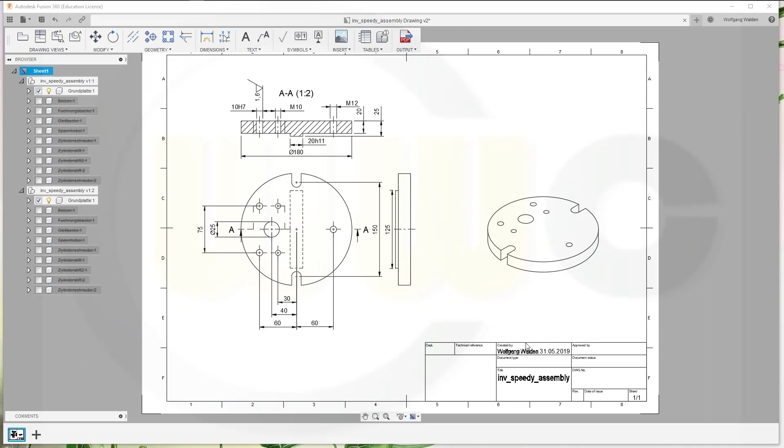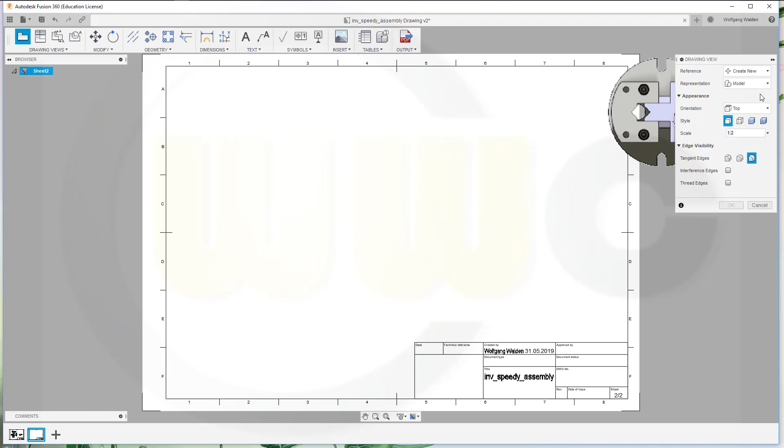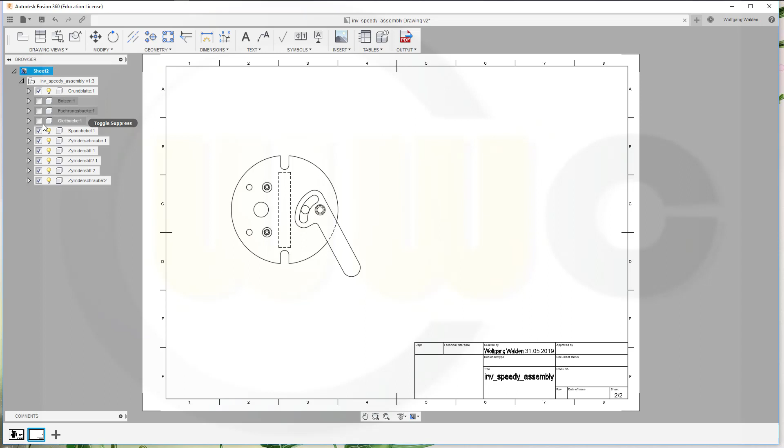Okay, let's insert a new sheet, and I need of course a base view. That would be the top view, yes. Scale should be maybe 1 to 2, yes. And let's see, we've got visible edges, I need hidden edges. And let's place it here. And okay. Now let's hide all those we don't want to see. I just switched them off.

Okay, I need a projected view, so I go to projected view. That would be the parent view, and let's move this to this side. And okay. This one should be, of course, without hidden lines. So just double click and make it only visible edges and close.

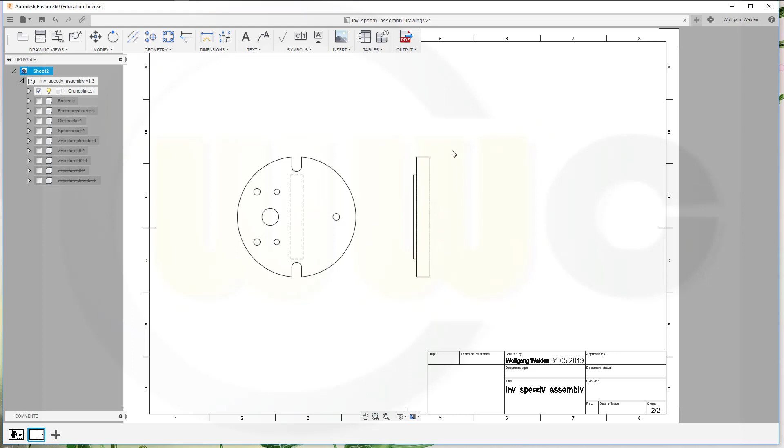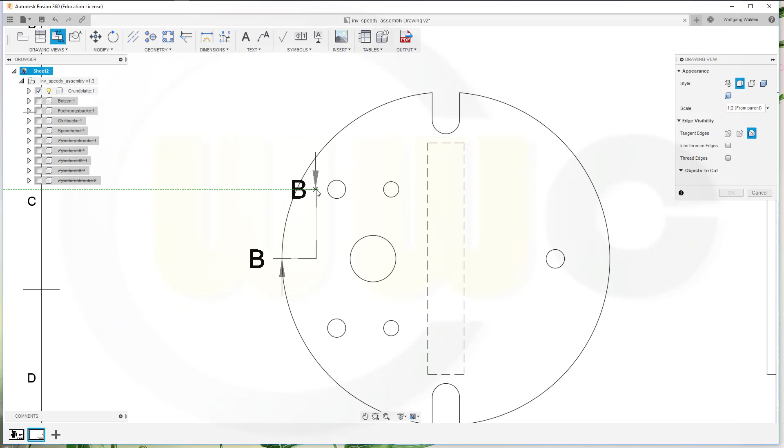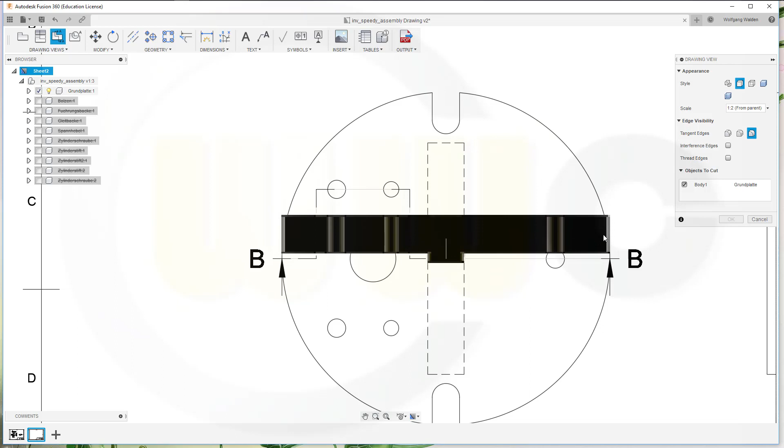Now for the section view, you have to take care that you align it properly. I want to do it here. Let's go here, click, move a little bit, let's zoom in over here, then go straight up, click, go over here, click, go straight down, because if you're not straight down it will not work properly, like this. And now go for continue, and I want to move it above, and yes, that's okay, so just confirm.

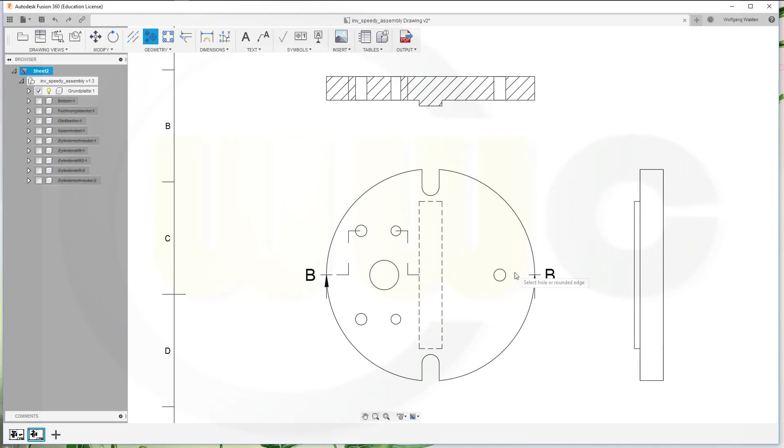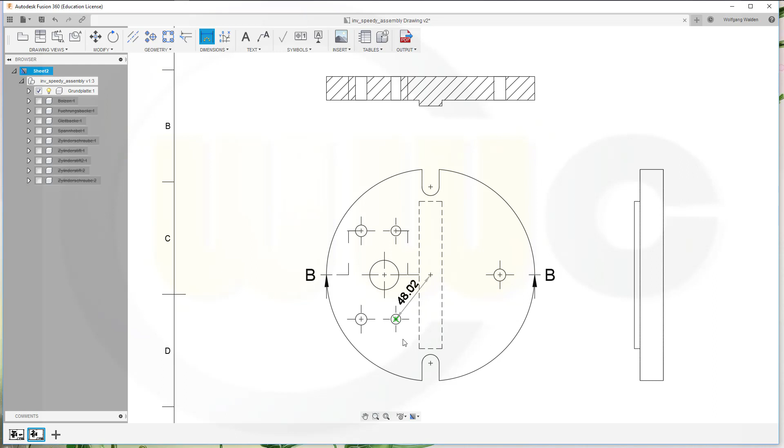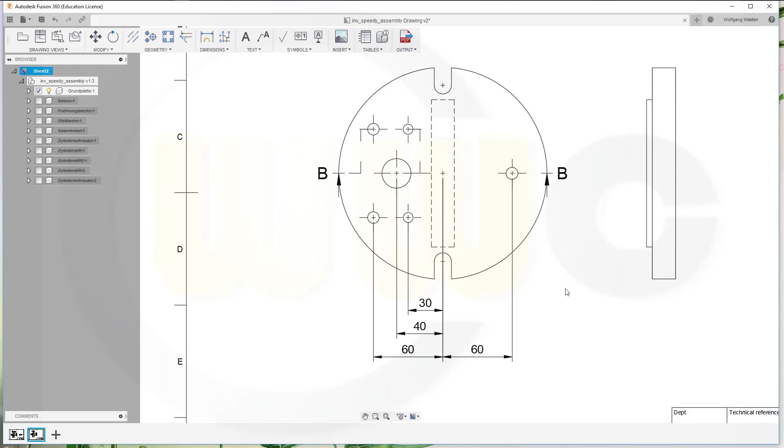Before I begin dimensioning, I will insert those center marks. So there should be one here, here, here, there, here, there, over here, and of course one here. Now begin dimensioning. I want to go from this one to that one. That would be my start dimension for my baselines. So go to baseline dimension, select the baseline, and select the other circles like this, and right click OK. Now I can move this up like that, for example. Some more dimensions.

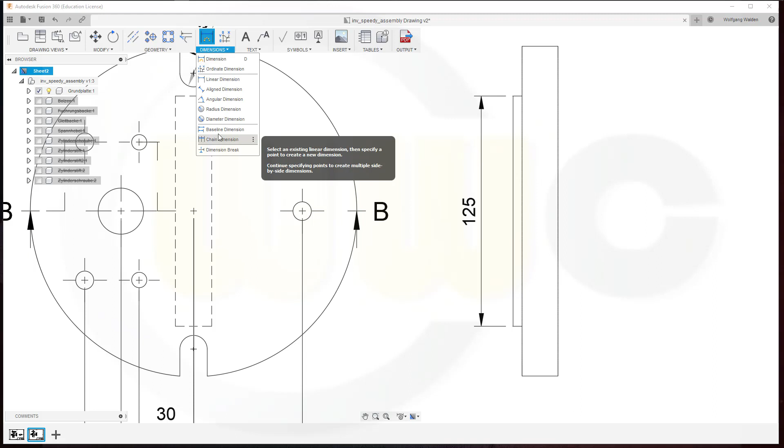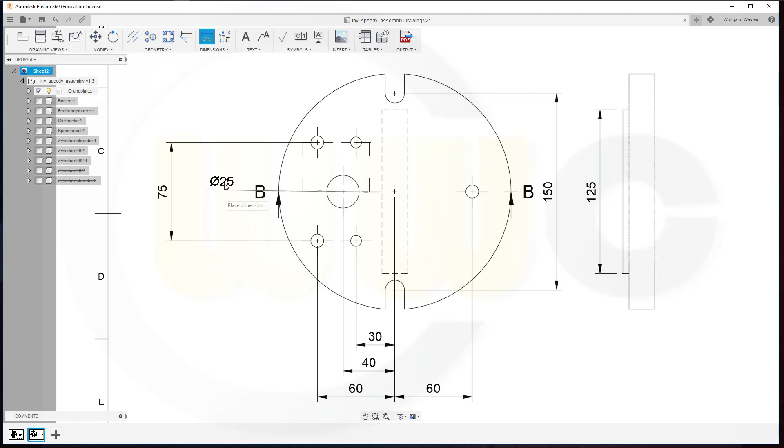This one. Let's try circle, circle. Not possible. You can go, yeah. So I have to select the center marks like that, then it will work. Another one here, and for that dimension I could not make it vertical or horizontal aligned. I have to live with this one. Another one here, up there, this one, this should be diameter. I will add this afterwards.

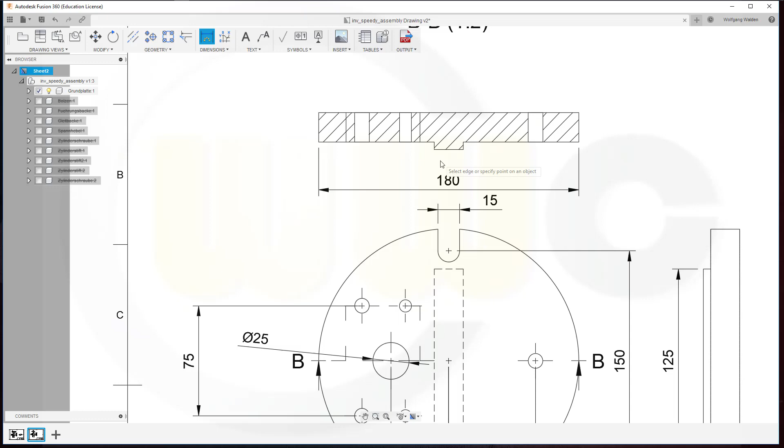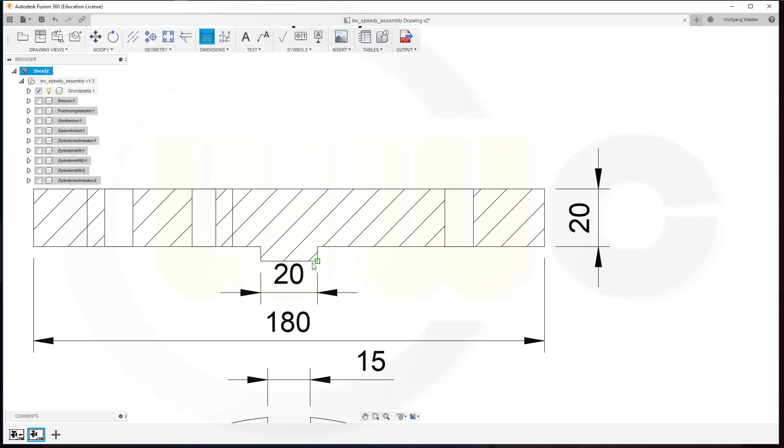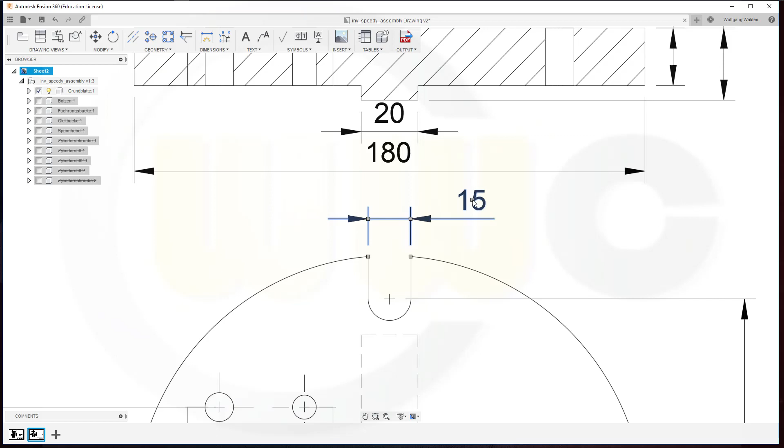This should be 20, and this is 20, and that one is 15. Okay, now move this up a little bit. Okay, move that one. Move this a little bit down. Move this over here. Maybe like that. Now I have to change.

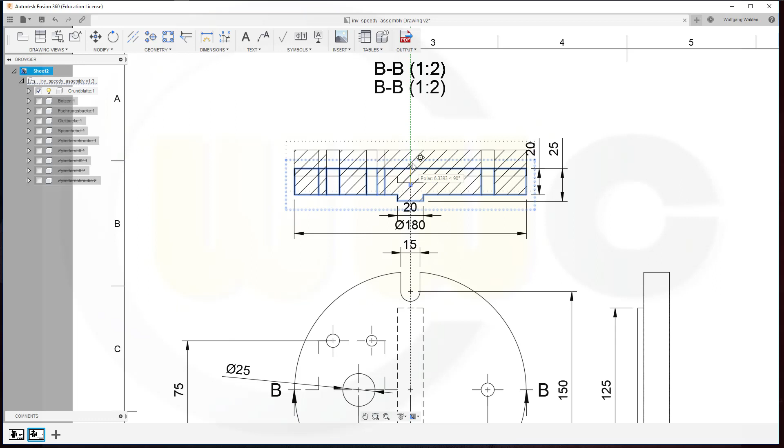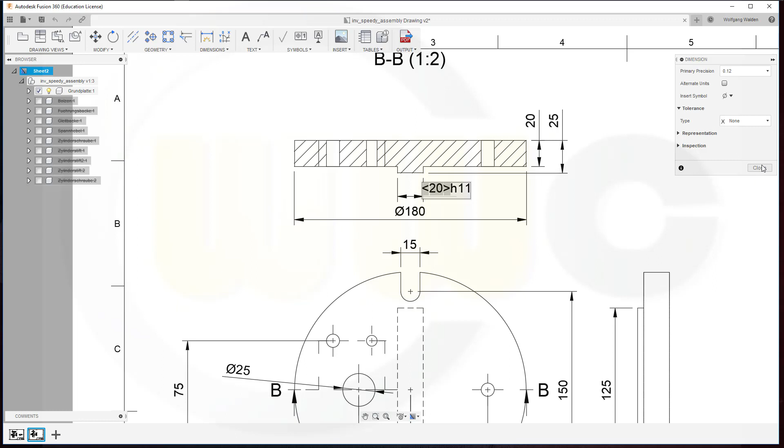This one should have a diameter, so double click it and give it a symbol, but before the 180, that would be this symbol. Close. And maybe I should move this up. Maybe like this. Then I got a little bit more space to make this more readable. So this one should be here, and I want to add a text that would be h11. So for tolerance, limit deviation symmetrical none, we'll go for none and we'll add h11. Just type it in, close. And if you want to have a space, just make a space in between. Okay.

Then we got here one. There's another one, and the last one would be here. I will move it up. Now let's edit those. Move it here, double click and add a space and H7. This should be M10. Just delete and write M10. And this should be M12. And I could move this maybe to this side and move this up, maybe like that. I need some more center lines.

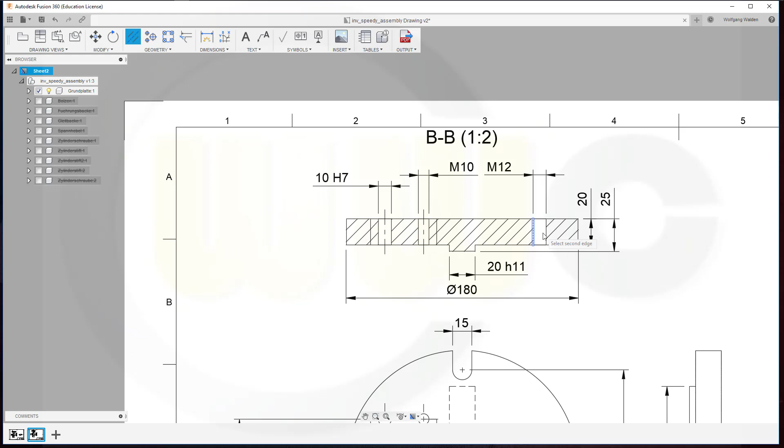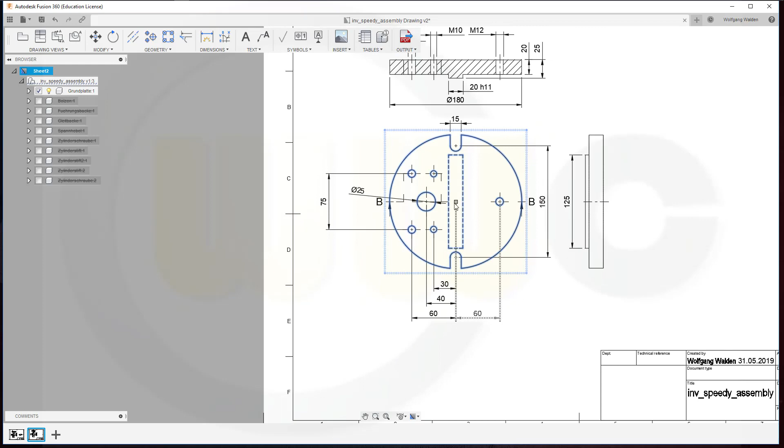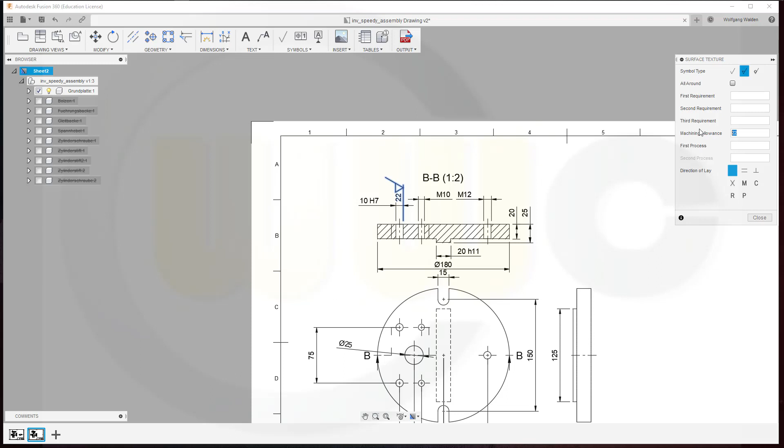That, and the surface finishing. Let's give it a little bit more space by dragging this down, and that one as well. No, don't select it here, select it, click here. No, sorry. Move. So that's the correct one, and now you can drag it with that square a little bit down. So for that surface finishing symbol, go here, select the object, that would be this one, drag it over here and go to this side and enter. Now it should be this symbol, and we need a value, not 22 but 1.6 machining allowance.

Okay, the other two I cannot do because you always need an object where you could attach that surface texture. And I'm not able to do some fake objects here and to add those symbols.

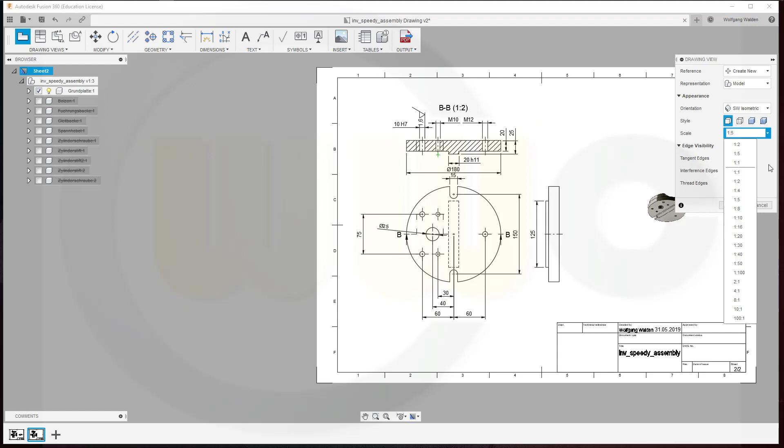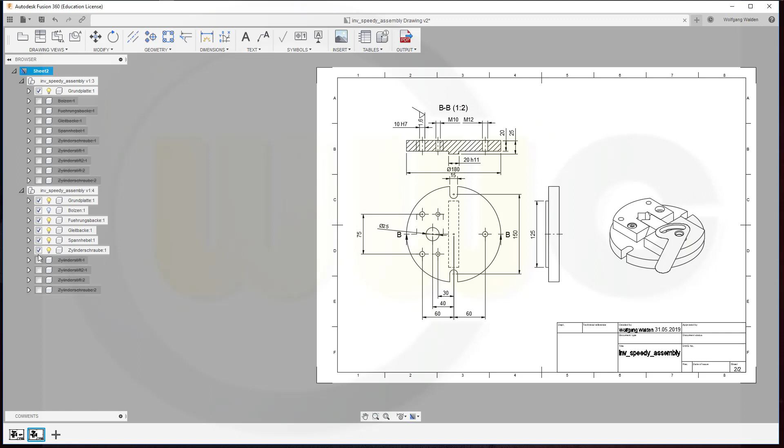Finally, I have to add another view, an isometric view, so go for another base view. Go for isometric. Let's see. No. And scale should be 1 to 2. And it's not southwest, but it's northeast isometric. Yes. Put it right there. Confirm. And now, as before, hide those, but hide will not work, so you have to switch it off like this, same way I did it before. And I've just got my brown ground plate left. Okay, and I'm done.